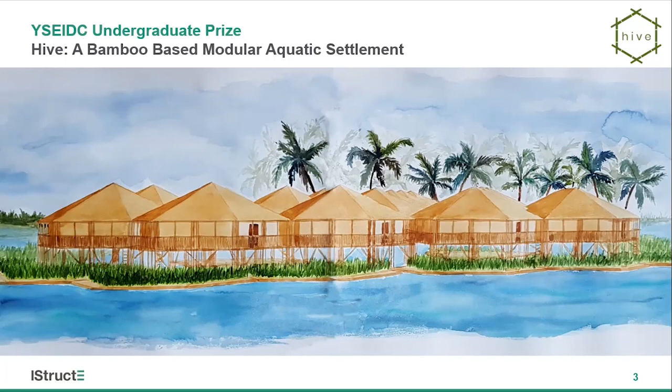So our modular hexagonal structure is composed of stilted buildings and rafts, and as far as possible, we used only natural vernacular materials. It's not just low carbon because of that, but we hoped to sustain as much high cultural sensitivity as we could as well. We focused on Bangladesh simply because that country has a major threat of rising sea levels. It's obviously a very flat country, coastal country, and very vulnerable. It also had an abundance of bamboo-based architecture, which we found very inspiring, especially as bamboo is seen as a great emerging sustainable material.

So we developed some initial ideas individually, and after discussing them, we noticed that there were several recurring themes. For example, our focus on vernacular design and wanting our settlement to be a platform for the community to thrive, or how our designs were all modular in nature to allow the residents to customize the areas, all while remaining connected. We selected ideas to carry forward, but we always kept in mind some key considerations.

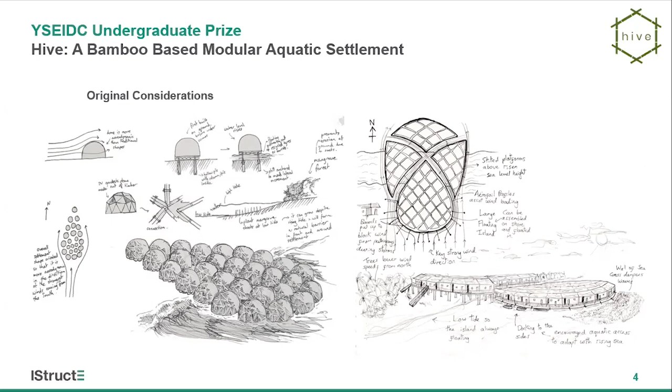Our key focus points in the design development stage include aligning with the UN Sustainable Development Goals. We wanted to tackle the brief with a humble design revolving around climate change and its impacts by using locally sourced materials to create a renewable and sustainable community. We also envisioned the settlement to recycle its parts, minimizing emissions and maintaining a net zero operation. This was hoped to improve the localized area to develop a self-sufficient economy based on connectivity and better protection against natural disasters resulting from climate change.

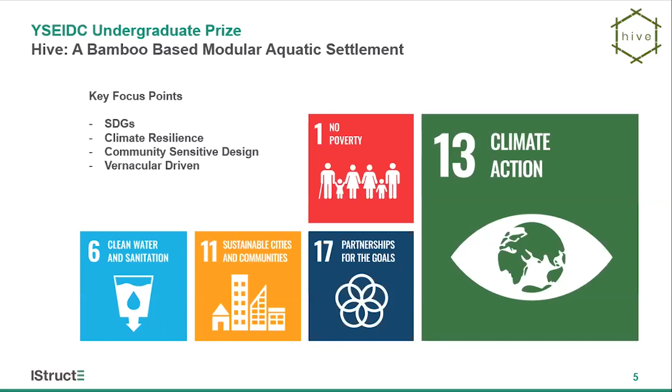Our second focus point is developing a community-sensitive design, where we want to create building blocks to strengthen the community, which are important to the respective cultures, especially in the least developed countries, and ultimately to preserve a similar way of life while increasing its quality. The third focus is the vernacular-driven design and thought process, where our research on local and traditional building styles inspired our design approach, and those elements were later incorporated in the final design.

Well, developing from the initial ideas and key focus points that were just mentioned, the final product of a modular hexagonal structure is created. The design focuses on modularity and adaptability of the skeletal structure, which reinforces the interconnectedness of the community and contributes to the growing structural strength and stability relative to the growth of the settlement.

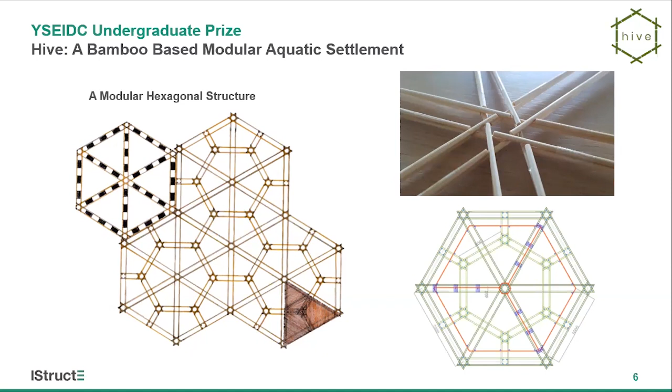So we were very keen to create something that wasn't just a set blueprint, and we wanted to make a building system to allow for cultural adaptation. Of course, there's more than just one community or country that is threatened by rising sea levels. And this hexagonal structure allowed us to create something that can grow indefinitely in different ways.

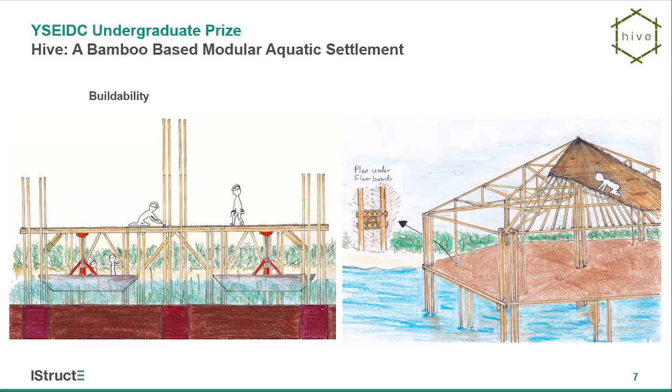Also, the axes of symmetry on a hexagonal structure mean that once you have one side length, it's very easy to start setting things out and to measure the rest of it all by relative dimensions, which we found was very useful for communities that don't necessarily have brilliant setting out equipment or amazing training. We wanted to use steel bolts and nylon ties in some of the joints just to make sure that it would be more durable over time. But as much as we could, we opted for local, natural vernacular materials.

Both conceptually and physically, we wanted our settlement to adapt to the changes in nature and climate so that they work together instead of trying to resist the eventual changes that climate change will bring. For this, we used a combination of rafts and stilted structures in our design, and the rafts adapt to the rise in sea levels, while the stilted structures provide the stability. We also decided to make boats the main form of communication to other areas.

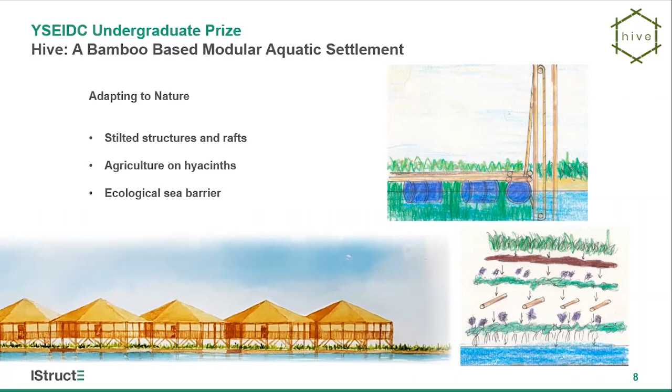And while researching, we found a way to grow plants on water using hyacinths that act as a mesh that supports a bamboo grid, and the soil then goes on top of that, and the plants grow on that. And this would become a large part of the livelihood of the community. We also designed to have an ecological sea barrier around our settlement using seagrass and mangroves to attenuate the waves, and it would grow along with the settlement.

So as Tobias mentioned earlier, we wanted to acknowledge the natural components of the materials, that they would degrade over time and they would need replenishing. Something that nature is very good at doing is replenishing itself over time. So the joint on the right shows the key hexagonal joint in our structure. It can be loosened and it has structural redundancy, which means that one column can be taken out at a time without having to take down the entire structure.

Of course, you can't have loads of people stood on the deck while this is done, but it should allow for one column to be taken out at a time, allowing the structure to be replenished over time, because bamboo isn't necessarily going to last very long in an aquatic setting.

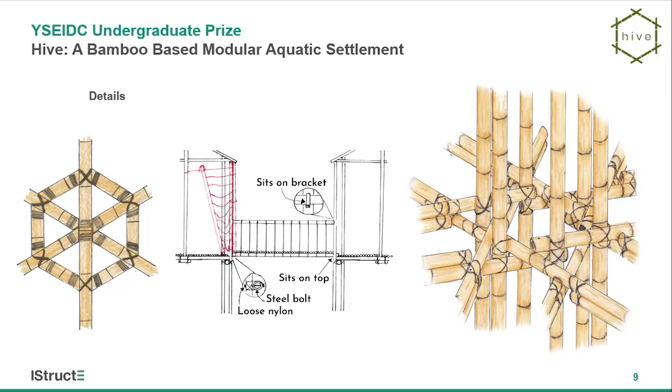The other detail that we wanted to highlight was the bridge in the middle. Obviously, having a timber structure is a fire risk even when it's in the sea. So instead of having every single module having a connected walkway and being really closely tessellated, we wanted to provide some joints in the settlement, divisions that could therefore have a bridge that could be taken up and down to allow for compartmentalization of the fire if one did break out.

So we have come up with some sample layouts for the hexagonal structures and rafts, which included a mosque, keeping the Bangladesh culture in mind. The sample mosque layout can be altered to match other religions when the design is adapted to other least developed countries. Our key approach here is to provide a blueprint for the settlement, where the final product is shaped by the communities themselves to accommodate their way of life rather than dictated by our design.

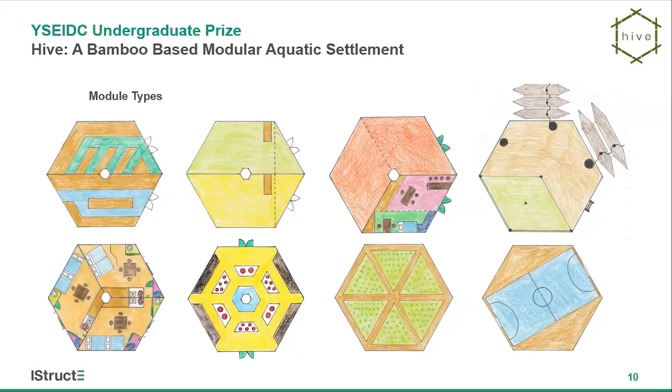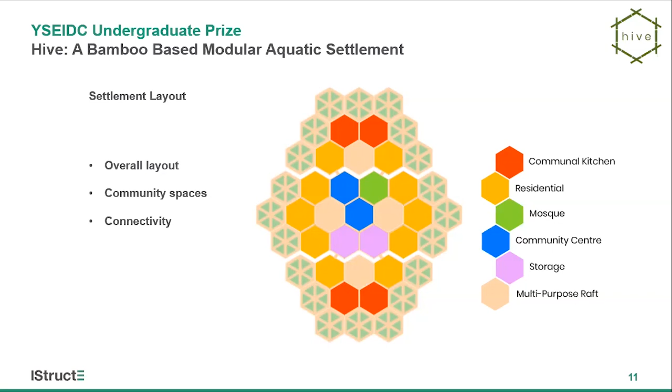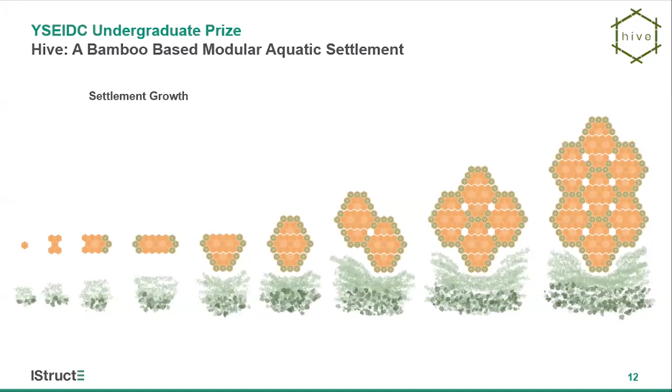So thank you very much for listening. It's been a pleasure to share our design with you, and we hope you enjoyed it.

So thank you so much for your presentation and outlining your design to us. It really exhibited a comprehensive approach and a justified solution to a really well-researched problem. As we saw, the quality of your branding and presentation throughout was really excellent, with a hive design providing this comprehensive approach to what we'd asked for.

The judges were really impressed by the level of the cultural and environmental research that your team had undertaken. You successfully produced a unique design that supported your findings about how the community lived. And so many of the design aspects were covered from the brief as well, including investigating water storage, investigating the waste management, and of course your use of sea barriers to protect the settlement from ongoing degradation as well.

We particularly liked the fact that you'd considered fire risks to the area, and you'd included a first aid point within your design as well. You did identify some important issues with the design, which the judges agreed would need some further investigation. So you were mentioning looking again at bamboo and exactly how you might want to use that. But overall, the judges found the design really interesting, and especially the problem particularly well researched. So well done.